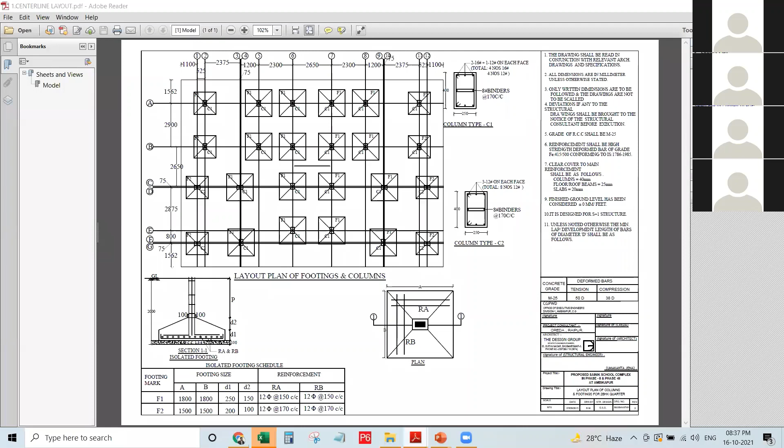Okay, so guys, we have a lot of different types of drawings when we actually start executing the work at site. These are some of the drawings using which you'll execute the work at the site. So this first drawing, which I'm showing you right now, is called the layout plan, center line layout plan. Hope you all have heard about this drawing.

Anyone who has heard about this name? Anyone of you? Center line layout. Yeah. Down here you have a foundation detail, but overall this drawing will be called a center line layout, right?

Before executing the construction work at the site, you have to perform the layout work. You'll do the markings in the field, you'll excavate for the foundation, then you'll do the foundation, and then you'll really start the construction. So this is the very first drawing which you have to deal with, and this is called the layout plan. After this, you'll perform the beams.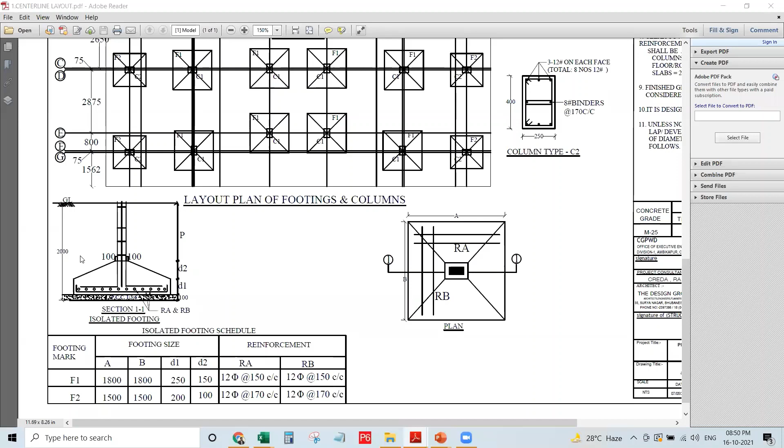Okay, the main bar runs the main bar. I think the main bar is the one at the bottom, while the distribution bar is the one that is represented with the dots. Yeah, that's cool. That's right. But I'm asking, see, okay, let me just give you the answer.

In this footing, you'll have two dimensions. One is shorter one and one is longer one. Getting my point? So the bars which are parallel to the shorter dimension are called as main bar, and the ones parallel to the longer one will be called as distribution bar. Is that clear? Yes. Okay, so this is how you'll recognize which one is main and which one is distribution. I'm not going deep into how you'll be calculating that, just a brief on how you'll recognize.

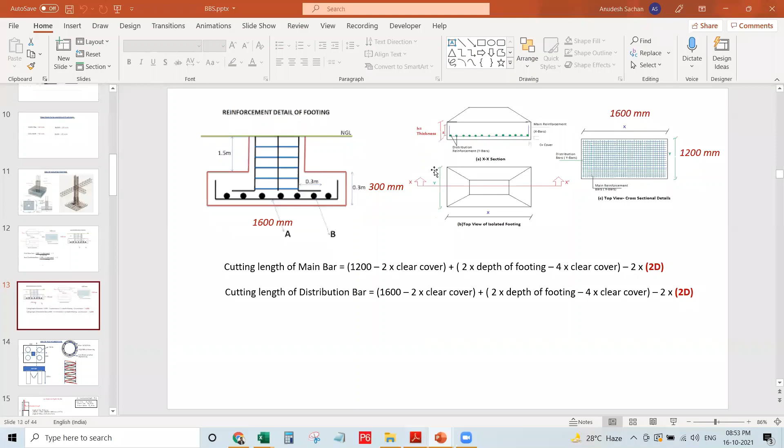Okay, let's go back to the drawing now. So now what is this? 12 phi at the rate 150 center to center. That means all these main bars are of 12 mm dia reinforcement. The dia of reinforcement here is 12 mm. And the center to center distance between each and every reinforcement steel provided is 150 mm.

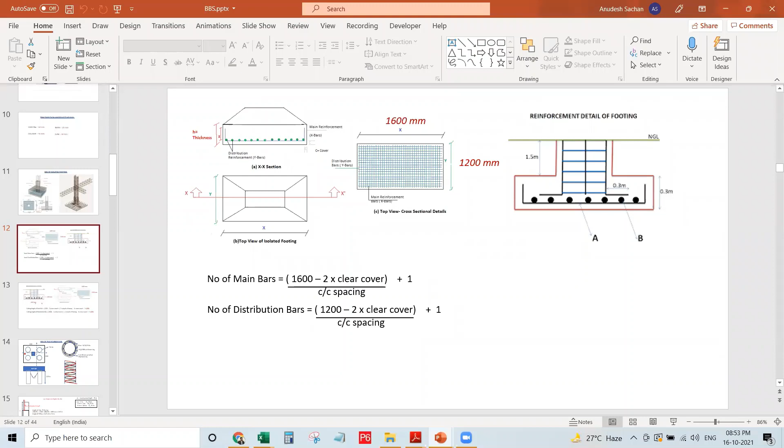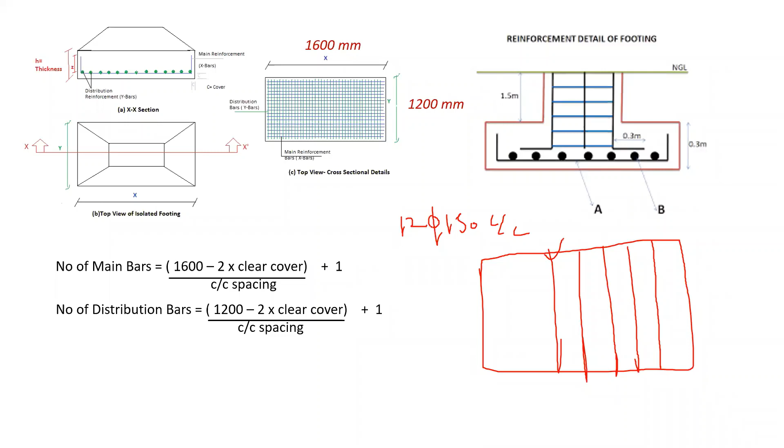Getting the point, guys? Let me just draw. That means if it is written 12 at 150 center to center, all the reinforcement steel provided at these sides are of 12 mm dia. The dia of reinforcement is 12 mm and the center to center distance is 150 mm. Correct? Okay, let us move further. So these were the two things. You'll be able to find out what dimensions are given here and all other stuff.

Now moving up here, you have been given the details about the columns as well. What is this rectangular portion, the outer one? This is the exact column, right? This is the dimension of column, this 400 and this 250. This is the real, outer dimension of column. Then you'll subtract the clear cover. Let's suppose it's 40 mm. Then this inside rectangle represents the stirrups. Stirrups are provided in the column, beam, and all these structures. Have you seen stirrups, guys?

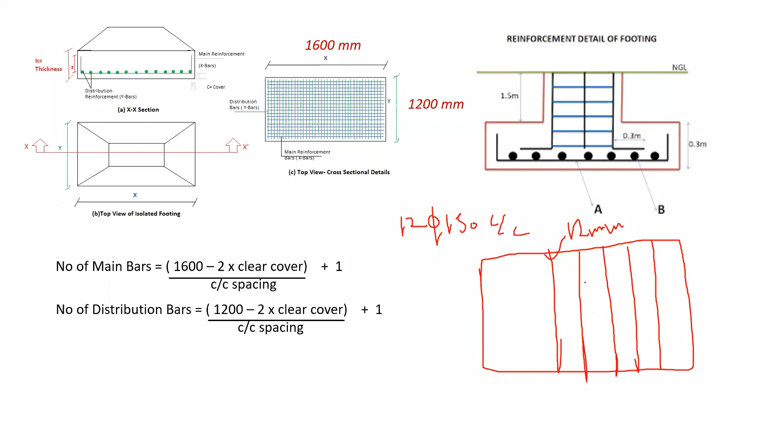Have you guys seen the stirrups? Let me just show you. These all are stirrups. Have you seen these kind of shapes? You'll have different names, 2 legs, 3 legs, 4 legs. That depends on these hooks. If you have 2 hooks, it is a 2-legged stirrup. If you have 4 hooks, it will be called 4-legged stirrups. So these are the stirrups.

Now let's go back to drawing. So this is the stirrups. Then you have total 8 reinforcement steel in the column. And what is the dimension here? These 2 outer reinforcement steel are of 16 mm dia, and the one at the middle is of 12 mm dia on each face. That means this side and this side. The two at the corners are of 16 mm, and the mid one is of 12 mm. Getting my point?

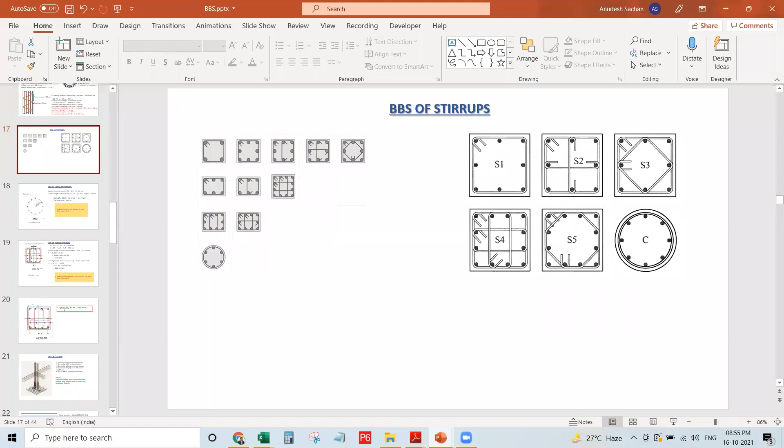Yes, sir. Okay. And the mid one? Sorry, I don't get it. You didn't get it? Okay, let me just clear it again.

See, this one at this corner and at this corner, okay? These are of 16 mm. Okay? Yes. And this one again are of 16 mm. Exactly. That's clear. So total you have 4 reinforcement of steel which are of 16 mm dia, right?

Now let's move further. This at the mid, and this one at the mid, and these 2 at the center here. These are of 12 mm dia. So total you have 4 reinforcement of 16 mm dia, and again 4 of 12 mm dia. All right. Get it, sir. Yes. Now the steel used for stirrups is of 8 mm. Getting my point? This is stirrup which I just showed you. That is of 8 mm dia.

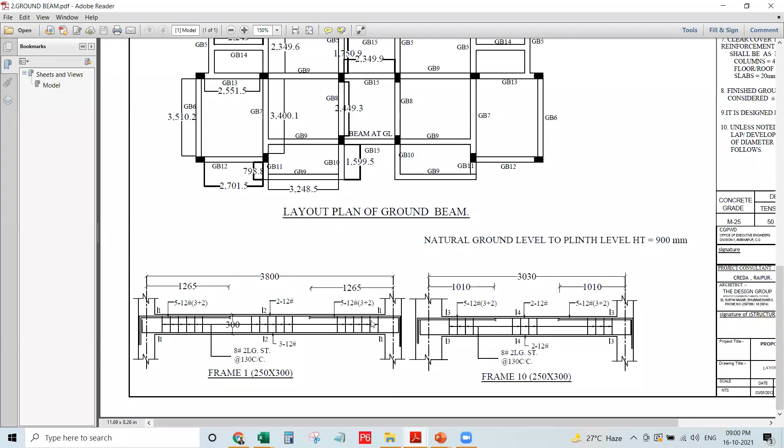300 mm by 250 mm. I think that is the using. Sorry, will you please repeat? The 300 mm by 250 mm. Yeah, that's the dimension of the beam, right? Yeah. That means the depth of beam is 300 and the width is 250.

And always remember, whenever you have been given a dimension of beam, whatever will be the large dimension, that will always be the depth. Because in case of beam, you'll always have a higher depth as compared to the width. Okay. Yes. So here 300 is the depth of beam and 250 is width.

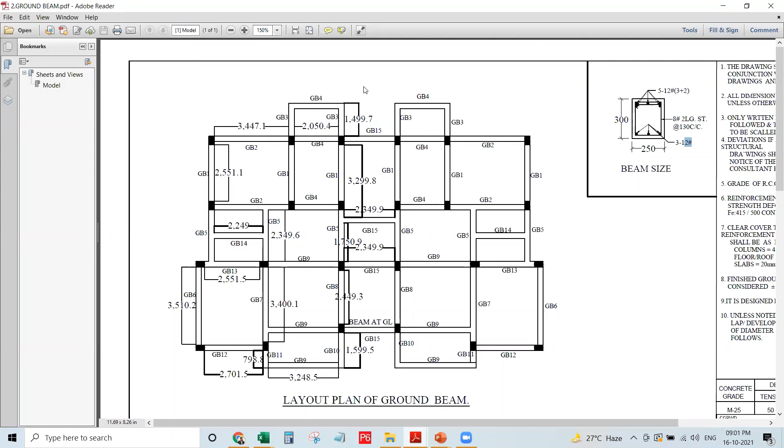All right. Now, if you'll see inside there, you have got there 5, 12, 3 plus 2. And bottom there is 3, 12. That means all these 3 bars are of same dimension, that is 12. Okay. And here, why you have got the 5? 3 plus 2. That means, let me just draw this diagram into the PPT. Let's just cut out this portion. Okay. Let's go back to the PPT. Okay.

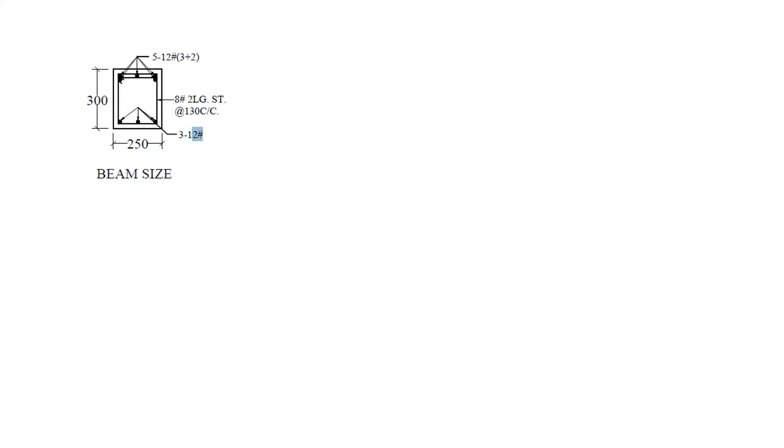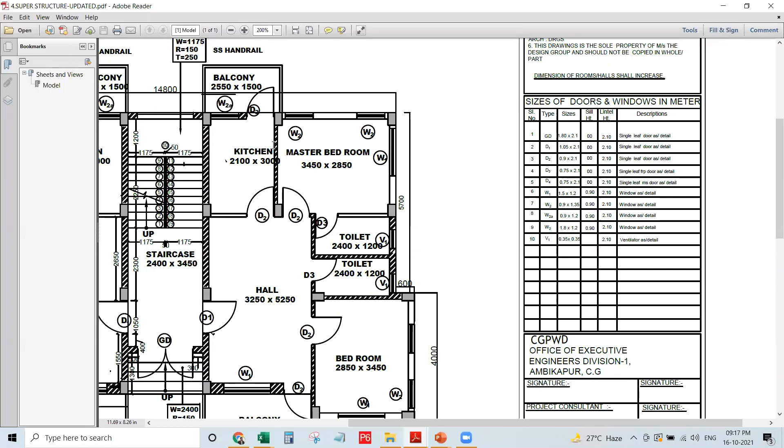If you'll go here at the top, you'll find out the dimension of door and windows. These are the dimension for the doors. This D1, D2, D3, D4 are the dimension of doors. W1, W2, W2A, these are the dimension of windows. These are the markings. Okay. This exactly looks like the architectural plan which you draw for the house. Is that clear, guys? Yes, it is clear, sir. Okay.

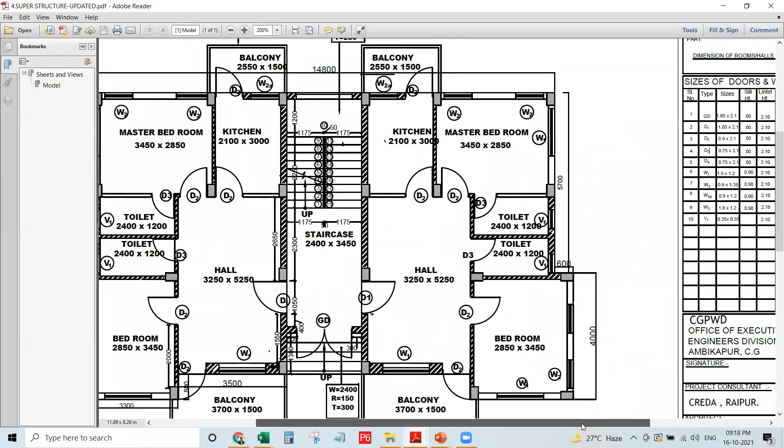Now moving to next drawings. These are the details of.

Okay, please mute yourself, guys. Can you guys please mute yourself? Sorry, the network is fluctuating. The network is fluctuating. No, you just please mute yourself. Okay, thank you. Okay. Yeah, network is bad.

So if you'll see this drawing, this is layout for roof terrace beam. You have slab that is exactly similar to the roof, right? And you have slab beams. Those are called as terrace beams, right? So these are again the dimensions, reinforcement details for the slab beam. We're not discussing here about the slab, but this is slab beam.

How you'll get to know this? If you'll cut down the section, this one, this is an extra portion at the top. This is showing the portion of slab. This is the slab, and below this one, this is your slab beam. So whenever you are constructing a slab, just make sure both the things, slab and slab beam, will be constructed at same point of time, right? It's not like that you'll prepare a slab first, then a slab beam, or the opposite of that. You are going to cast both of these at the same point of time, right?

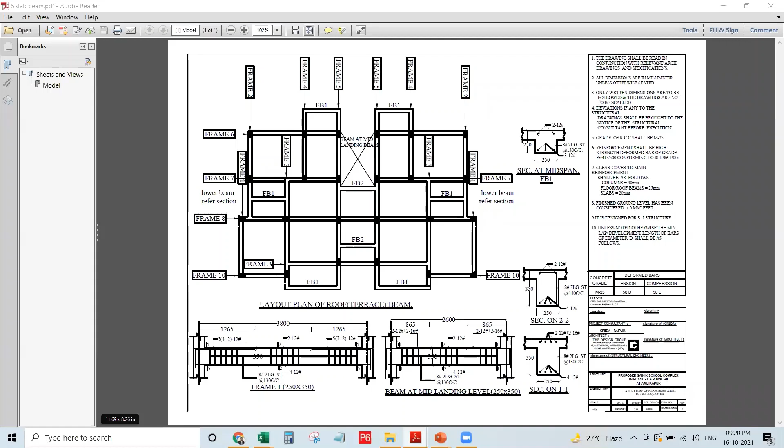And again, details for the slab beams are exactly similar to what you have seen in the previous slide. Going up next, you have details for flooring. That means what are the different types of materials or the stones going to be used at different spaces. So you'll see here at the bottom, at front and rear balcony. This is the flooring details.

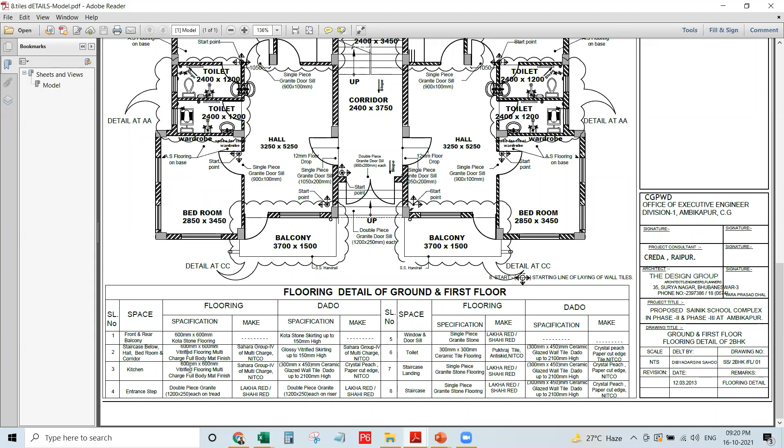What is the type of stone you'll be using for front and rear balcony? What type of stone are you going to use for the staircase? What type of stone are you going to use for the kitchen, and so on and so forth. So this is just the basic. I told you how you guys have to read the drawings. After reading the drawing only, you'll be able to do the layout work at the site, and you'll be starting your construction.

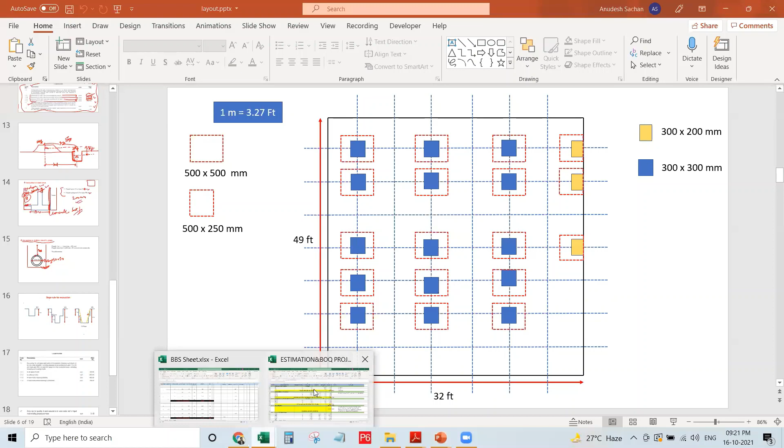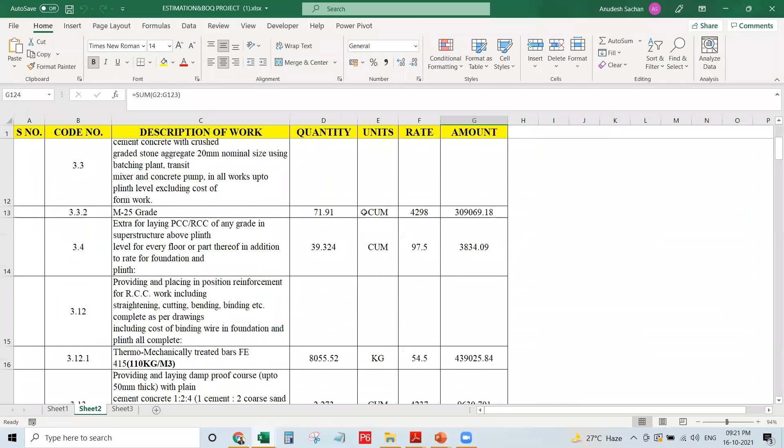Once you get how to read the drawings, you'll be able to estimate the total quantity of material which is required to construct a house. And from that, you'll be able to find out the total amount or the total expenditure which is going to come to build your total building. Right? You'll be able to get the total amount, total cost, or the money you need to build a house.

Okay. So the very basic thing which you should know for all these things is how to read the drawings. If you don't know how to read the drawings, you'll not be able to execute the work at the site. You'll not be able to find the quantity estimation, the total estimated quantity of different materials. So you'll not be able to find out the total amount which will be required to construct a house.

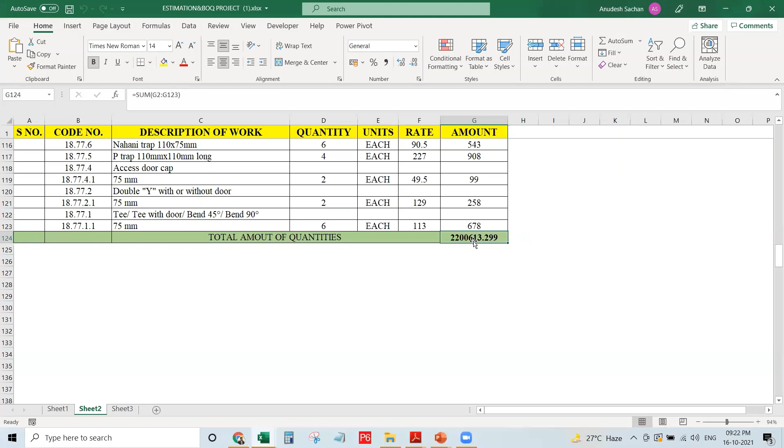Getting my point, guys? Is it clear to you all? Yes, sir. Okay. So the very basic thing is you should first know how to read the drawing. Is it clear? Yes, it's clear. Thank you very much.

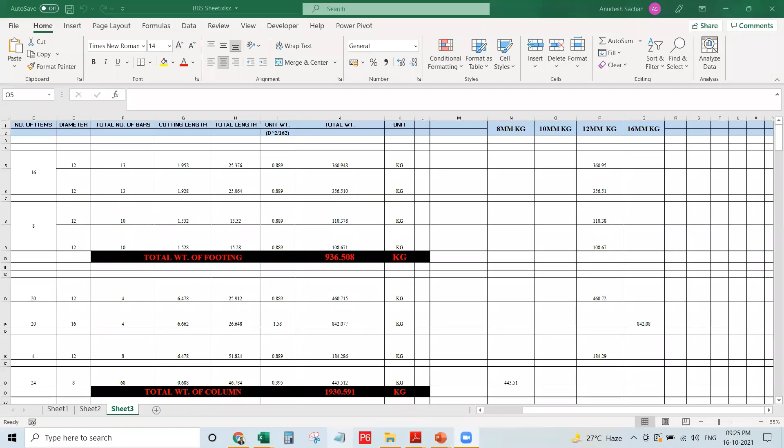On your layout, the layout you showed us now, the one that showed the pad footings alongside the columns, there was one that showed a cross sign looking like multiplication on top of the pad footings. So I want to know what that is illustrating. That is question number one. And then on the layout drawings... Let me just share the screen. Just point out what you want to say. Yes, thank you very much.

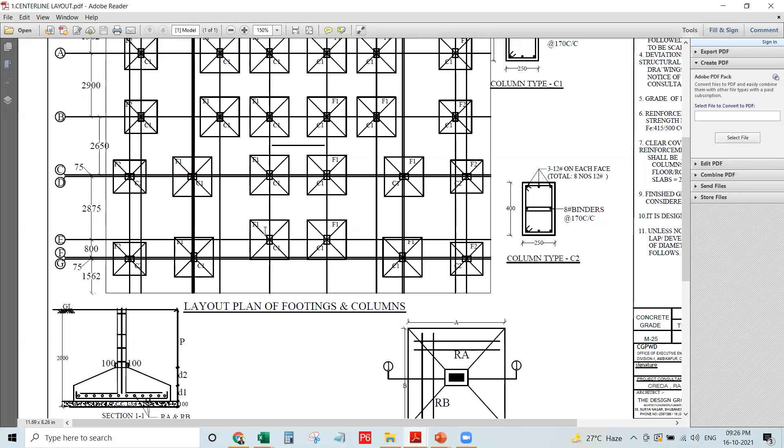Okay, so you can see there's a cross sign there, more like a multiplication sign on top of all those pad footings. I want to know what these are. Is this the sign you're talking about, this one? No. On top of the pad footings, as we are looking at it now. This F1 and this one. Okay, got it. This cross sign is just the representation, nothing else. Let me tell you why this has been given.

Okay, this is isolated footing, right? This is isolated footing, right? Yeah. Trapezoidal at the top. So how does the view of a trapezoid from the top look? Okay. Correct?

This is exactly how the top view of trapezoidal will be represented. Hope it is clear. The top view of what, sir? Top view of trapezoidal. Have you ever seen the trapezoidal, right? This is isolated footing. You'll have a trapezoidal shape at the top. So if you just see from the top. Yeah, got it. All right. Yes, the second one, thank you for that.

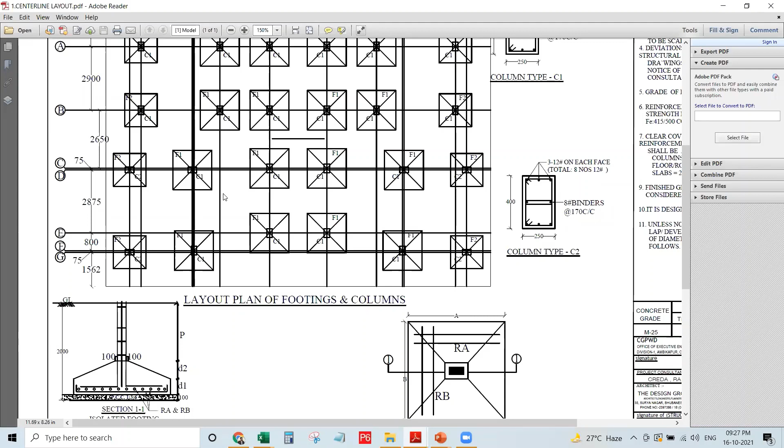The second one is on your grid lines C-D and F-G. I can see a difference of 75 mm. Yeah, exactly. Actually, not just because of the space constraint it looks like this, but if you see this number, this points out exactly here. The 75 mm difference is there between C and D. What difference is that, sir? What spacing is that, in between what and what? Okay, let me just try to explain to you why there's a difference.

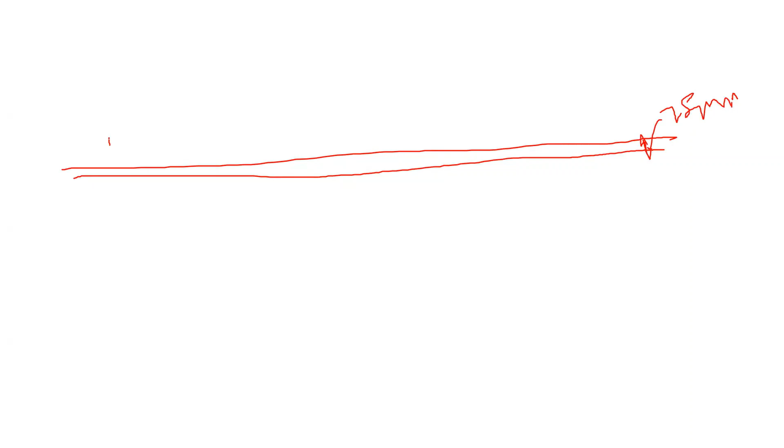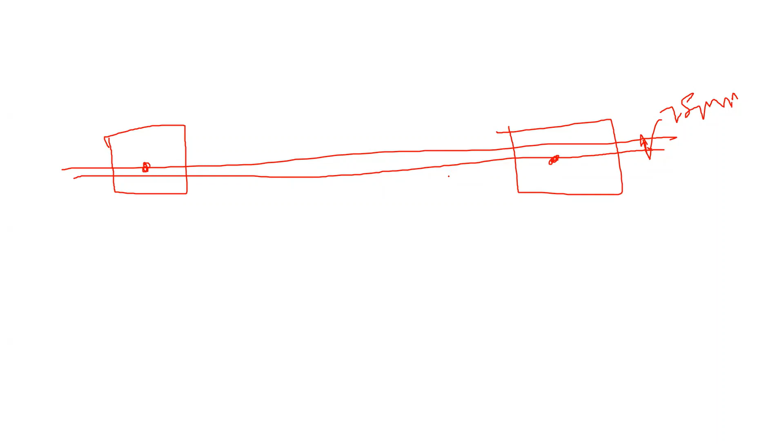So you have two lines having 75 mm difference. Now, why is there a difference of 75 mm? Because the center point of a few footings is coming in this line, and the center point of a few footings is coming in the second line. So you just have to take both the centers. Whatever footings are here, you have to mark the center point for all the footings so that you can mark out for the footings and for the columns. So you just have to mark out all the centers.

That's why we have two grid lines here, C and D. See this. This center point is coming in the bottom, D. This one is coming in D, and this one is coming in top, C. This is C. This is again D. This is again D. So just because of that, there are two grid lines, C and D. Thank you very much. All right, hope it's clear. Yeah, thank you very much.

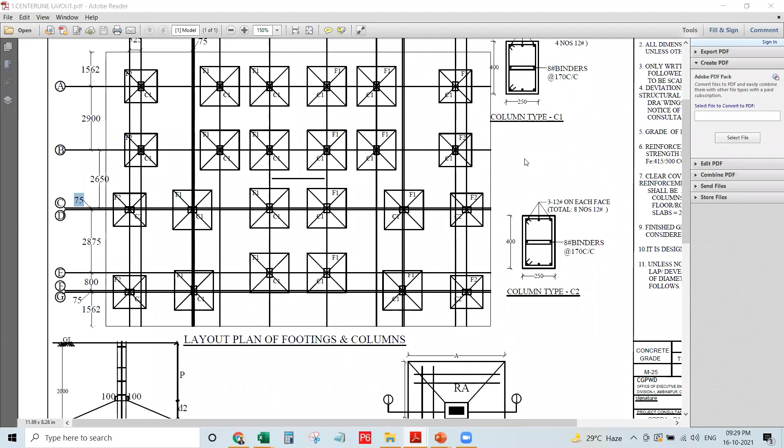Okay, guys, thank you very much. I would like to ask a question. Thank you very much for your presentation. Engineer Tokpa speaking. I couldn't get all the presentation, but I want to confirm the title page, the title of the drawing. How do you revise the drawings? I don't know if you explained that earlier. How many revisions and all of those things?

Okay, we have not included revisions here. The revision is a part when you are in the phase of preparing the drawings. Let's suppose while working at site, you find out that this is not exactly what is going to work at the site. So you'll ask for a revision. That's how the revision of drawings goes on. But here we are not considering revisions because all these are the final drawings. You'll have at least 8 to 10 drawings before executing the work at the site. You just have to know how you are going to read these things.

So revision is exactly the part when you are in the drawing phase. When you are preparing the drawings, there will be a revision because of scope change. Maybe the client is asking something different at different points of time, or maybe what has been represented in the plan or drawing is not possible to execute at the site. So you'll do the revision at that point. So all these drawings I have shown you are final drawings. We haven't considered revisions there. Thank you. That's all from me.

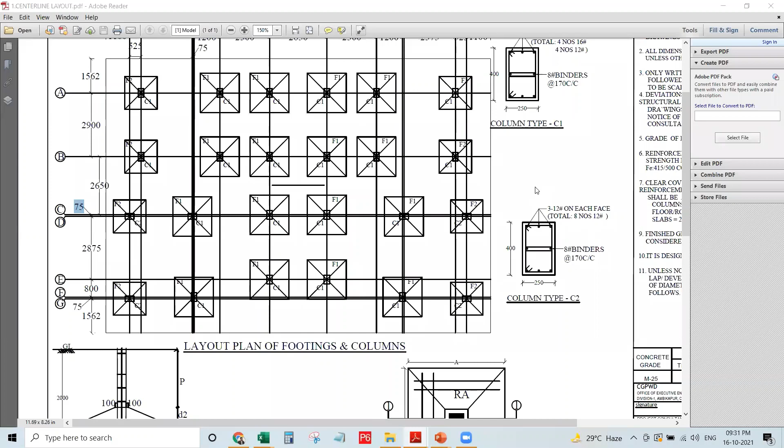All right, guys. We were just having 1 hour, so it was not possible to give you all the details. But I tried to explain the overview, what the complete course contents will be, and how you have to start. You have to start from reading the drawings, how to do the layout work at site, how to estimate the quantities and all. Then only you'll be able to become a proper civil engineer and work in this industry.